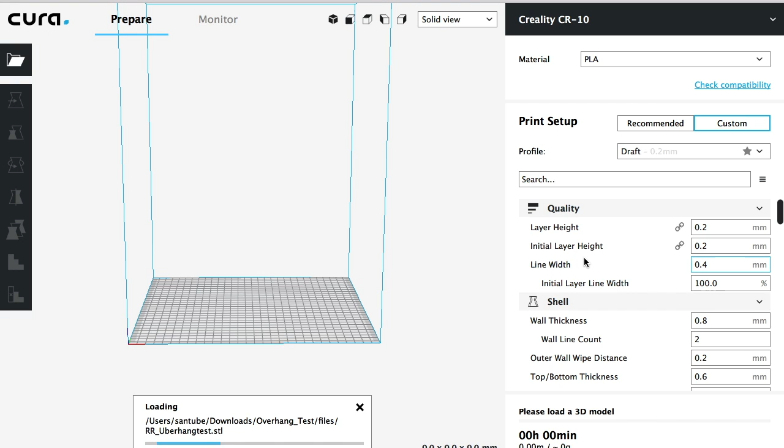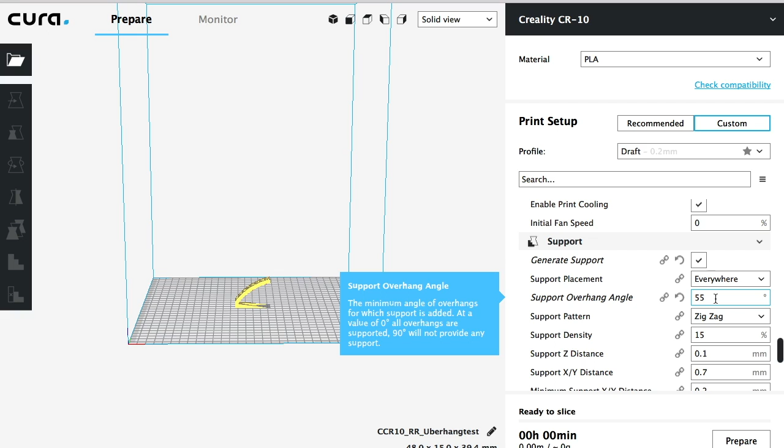Let me talk briefly about the support that Cura comes with. This is going to be mainly a review for most of you, but we're going to use this on our first topic, which is a support blocker. Okay, so if you click on generate support, which mine is already checked off, this is what we're going to be paying attention to: support overhang angle. Basically what this means is at what degree would you like Cura to start building supports.

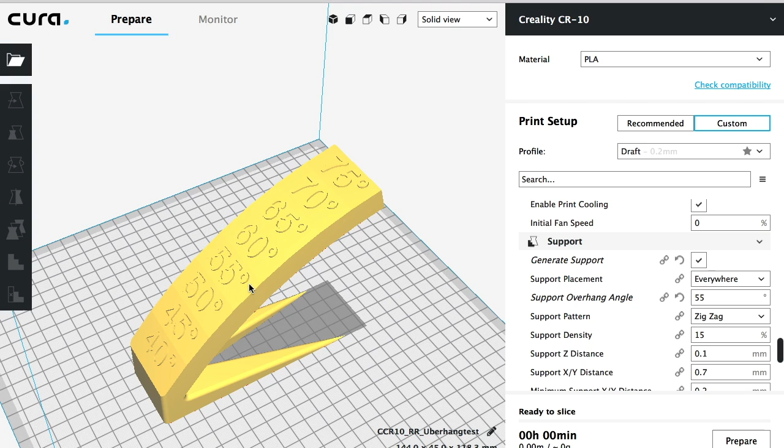So on this one, let's go ahead and scale this up just so we have more of a visual. So at what degree would you like Cura to print the supports? Would you like it to print at 40, 45, 50, 55? Now keep in mind, most 3D printers out there, guys, 50 to 55 is where it starts to need support. So your printer is usually capable of 50 to 55 where it can print without supports.

Okay, so mine's set to 55. So if you notice right around here, which is 55 degrees, the red part is where it's going to print the supports. To give you a better view of this, we're going to go into layer view. Now, why is this important? Why am I going over stuff that you already know? Because I'm going to show you where the supports are being printed, and with support blockers, I'm going to show you how they're removed.

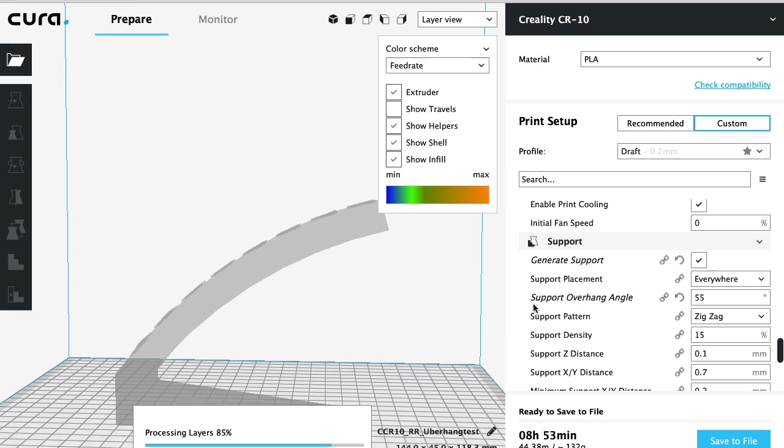Okay, so let's go ahead and slice this so we can get a view of where the supports are going to be and what they're going to look like at the moment with default Cura generating support. So if you notice, from 55 and on, it's printing it all the way through. But let's say we didn't want supports in the middle, or the model that you're trying to print didn't need the whole support, you think it's overkill.

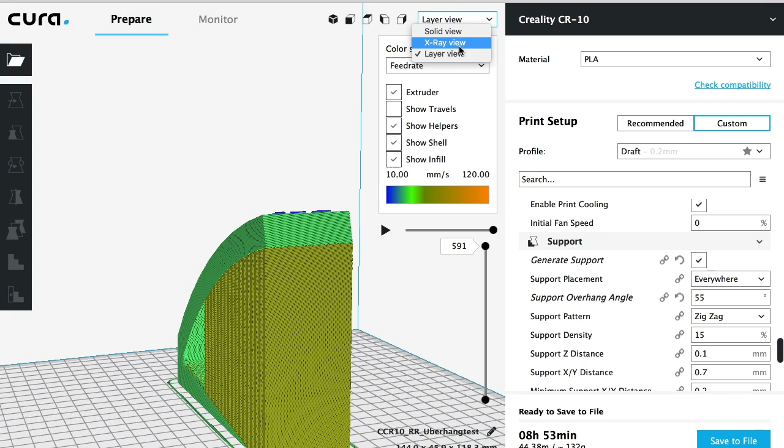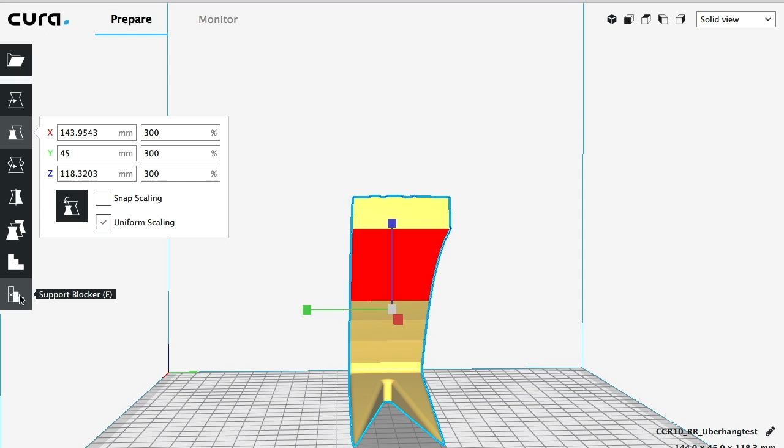So what you can do here is go back into solid view, and you're going to have to click on the model here. You know what, let's go ahead and make this screen a little bit bigger. So if you click on the model itself, which you have to do, you're going to go down here to where it says support blockers, and click on that.

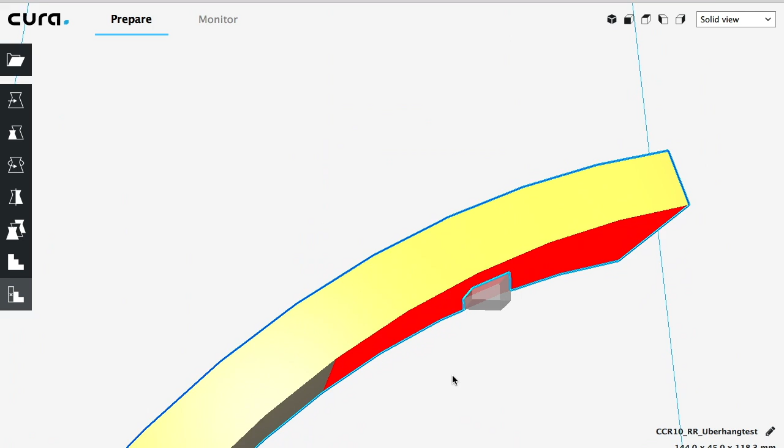Now wherever you click on this model, that's where it's going to block the supports. You can't see the supports at the moment, but we just saw it in the layer view. So I'm going to go ahead and click right there, and now you'll notice that there's a little square gray box there, and this is where your supports are going to get blocked. Now this doesn't help us much when it's only one little square box. So what we have to do is expand this to where we want the supports.

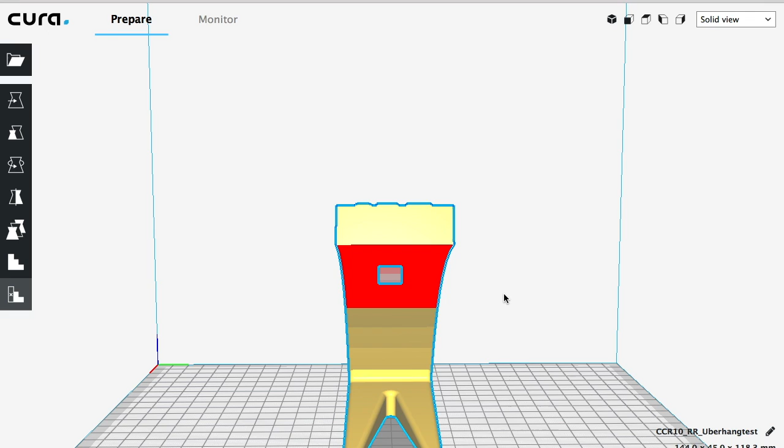Now this might work for certain models that are closer to the ground. But for a big model like this, guys, please be careful. See how the model's highlighted right now and the support blocker's highlighted right now. You have to click outside of it, then you can click on the little gray box. So now Cura thinks of this as a separate model, different from this model here, so you can technically modify it however you want. So we've already clicked on it, and we're going to go to scale.

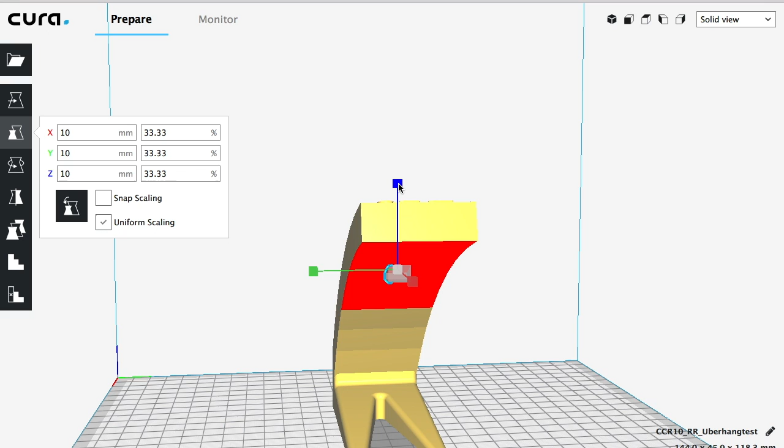This is one thing I don't like about this, and I also don't like about generating custom support: when you expand this, and this is something Cura doesn't tell you, notice everything expands at the same rate. So make sure you have uniform and snap scaling unchecked. Okay, so we're just going to go ahead and delete this. I just wanted to show you that.

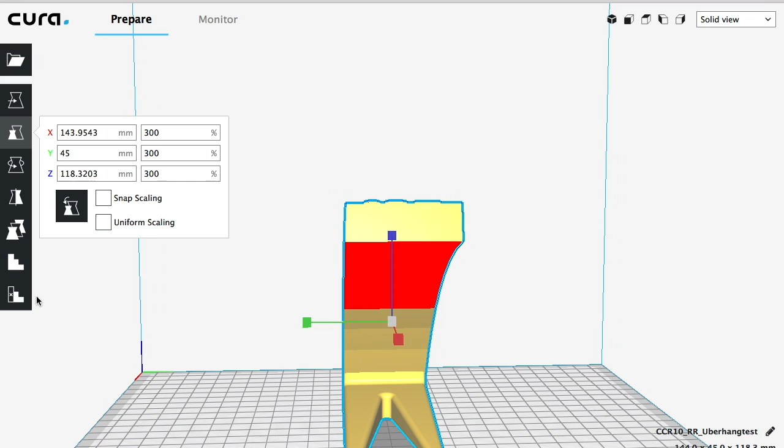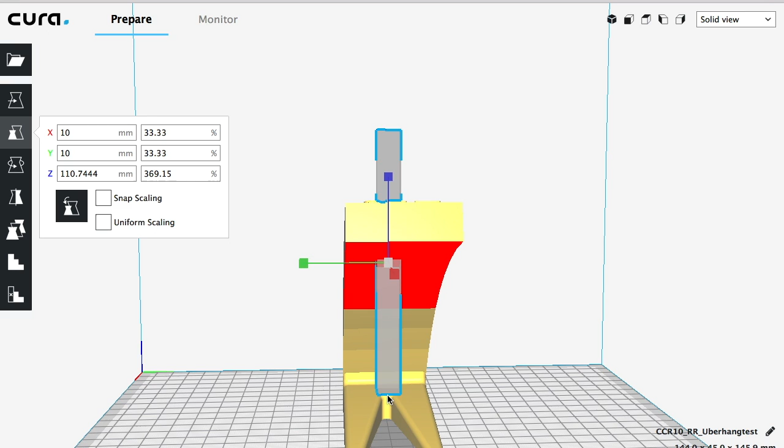So now if I click on the model, support blocker, there's my little gray box. I'm going to click outside, click back on it, and now if I go to scale with both of these unchecked, notice I can actually scale it to how I want. Okay, but another thing is it scales in both directions. So when you make it bigger, it grows on the top and bottom. It doesn't just grow in one direction, guys.

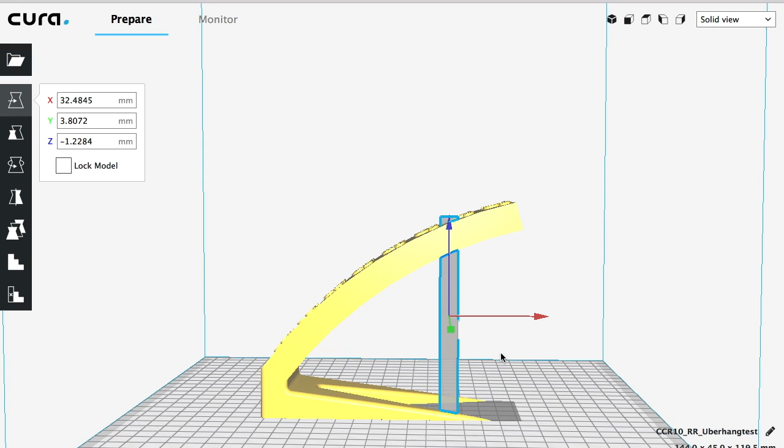So once you have your support there, we're going to click on move. Now you can actually move the support. I'm going to go ahead and move it down. Okay, so now we have the support blocker here. Now you don't want to keep making pillar after pillar after pillar. So what you can do, again, once you have this clicked and it's highlighted, you're going to go to scale. Now this part's a little tricky. You got to make sure you get the right angle on it. Then it'll let you select it and expand it. Okay.

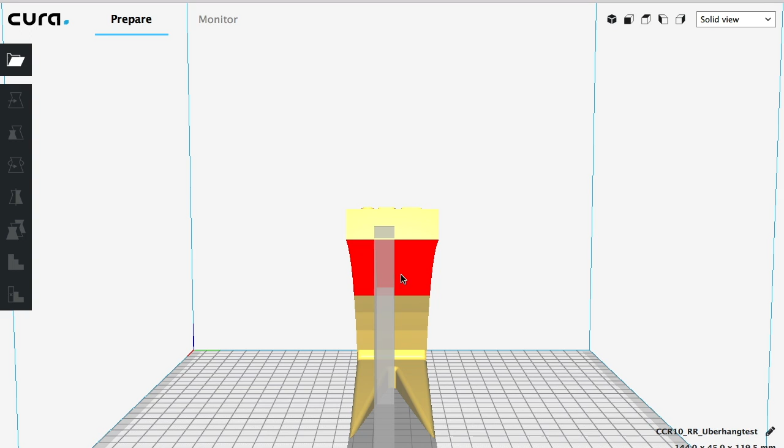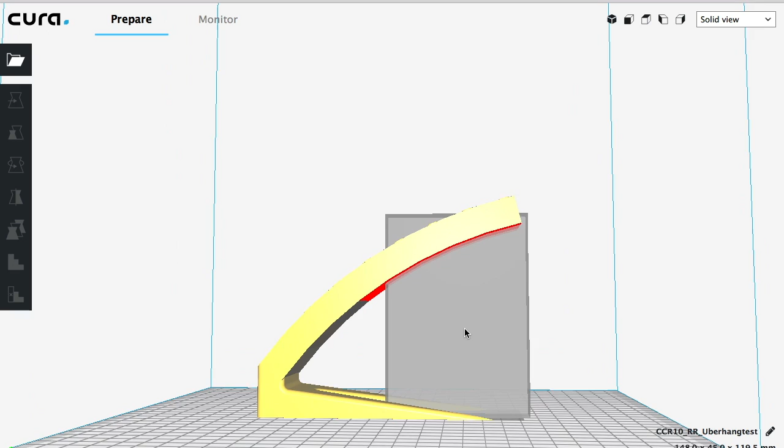So now basically what I just told it to do is I would like supports printed here, and I would like supports printed here, but I don't want it printed in the middle. Okay, now let's say if you wanted to go a little further out, you can actually do that by clicking on this and making it wider. And then again, you would just go into move and just move this over a little bit. Okay, so there you go. Now this is going to print supports, but it's not going to print where we told it not to. So what I'm gonna have to do here is bring this back. I'm gonna go and prepare that for you guys.

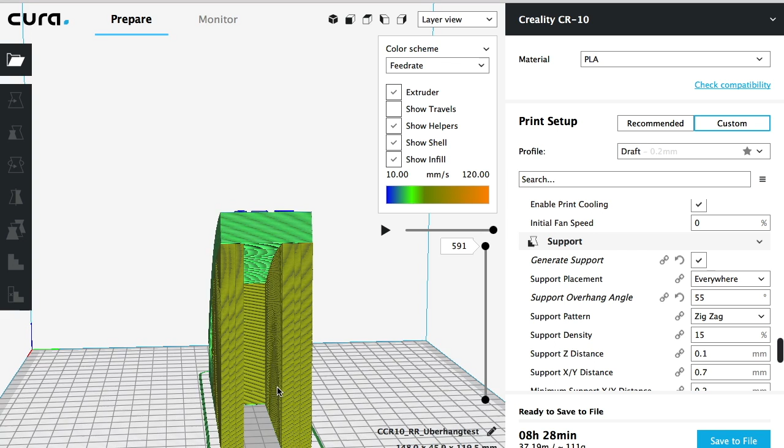Now if I go into layer view, if you notice from the side, same layers, right? It starts at, not percentage, sorry, at the same degree, at 55 degrees, it prints the supports right there. But let's take a look from the front. Notice there are no supports here. This is where our support blocker was placed.

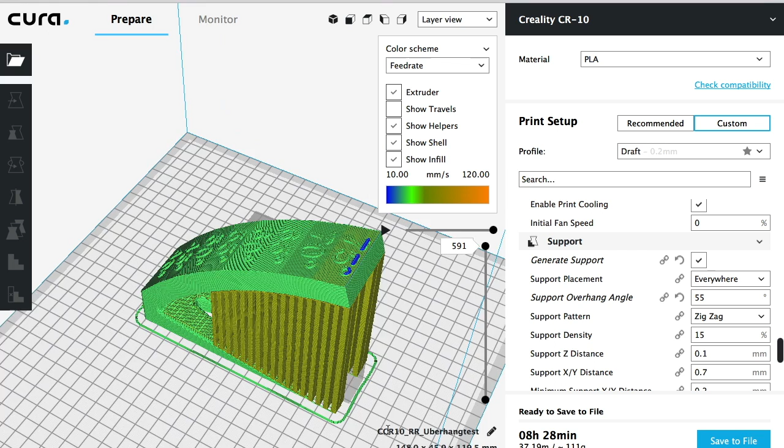Now I left this part of the support blocker up here on purpose. Okay, some people are going to try to fit it perfectly in here or build a column. You don't have to do that, guys. This part does not affect your print at all. If you notice, it doesn't affect it at all. It only affects your support. So you could have made it this big or gone lower below the bed. I like how Cura is not too picky about that. So that was fairly easy. It just takes some time because you have to actually fiddle around with it, get it to the right size and things like that. Okay, so now that we're done with support blockers, we're going to talk about custom supports.

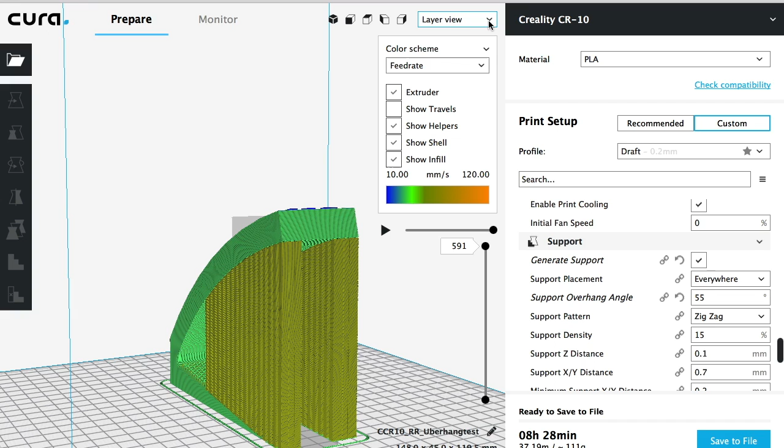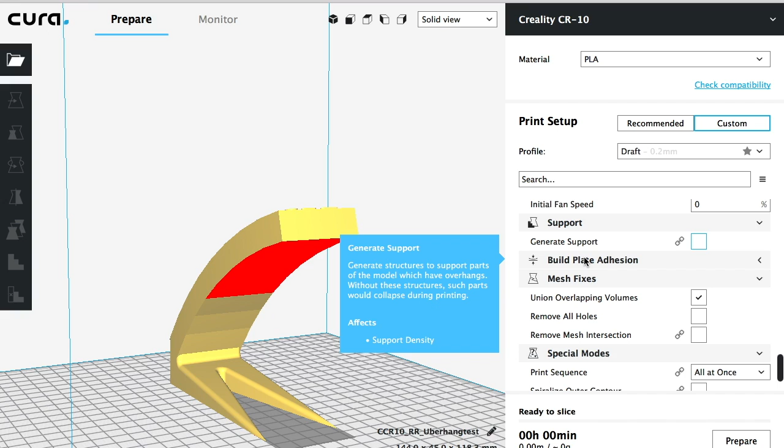Okay, so let's go back into solid view. We're going to go ahead and delete this right here. Okay, so one important thing that you need to know when you're actually using custom supports, you have to have generate support turned off. You cannot tell Cura to create supports on its own by what overhang angle you have specified. You have to have that turned off. So my support's going to be turned off. And for most of you, you're probably wondering why do I have custom support showing on the left and you don't? Well, that's very easy to fix, guys. You're going to go into Marketplace.

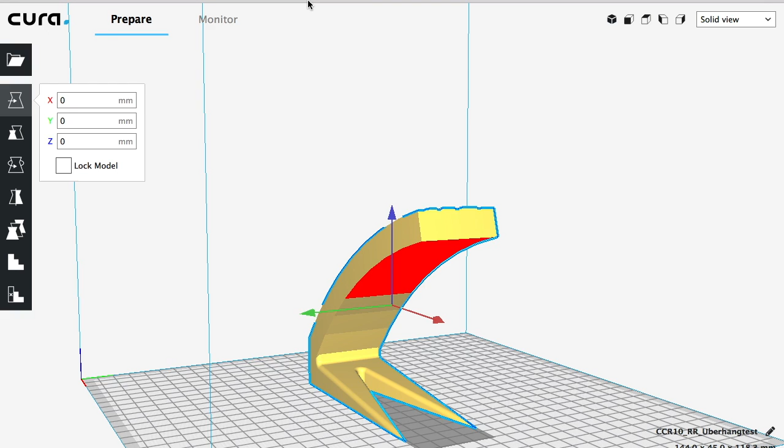Then you're going to go into plugins. There's a lot of great plugins here that you can use, but for today, all we're going to do is custom supports. Mine's already checked and installed. All you got to do is click on this right here, and once you click on it, you'll get an install button. And once you do install, I'm pretty sure on Macs, I don't know about PCs, but on Macs, it will restart your Cura, it'll kick you out, and it'll restart it so you can actually put this on the left side.

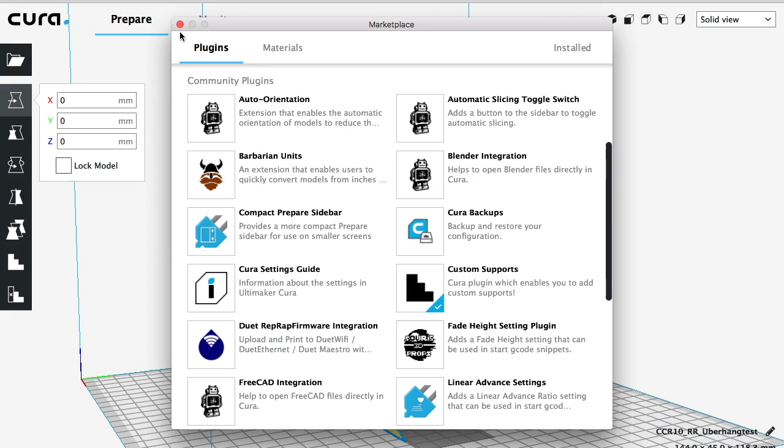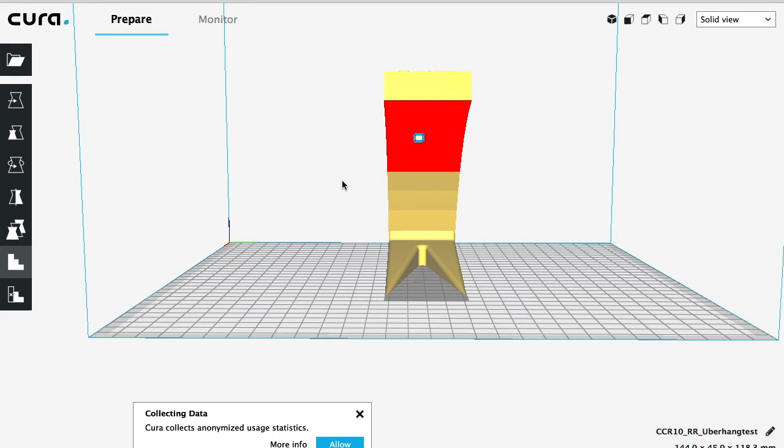Alright guys, to generate custom supports is basically the same concept as a support blocker. What you're going to do is, of course, click on the model itself. Once it's highlighted, then you're going to go to custom supports right here. Once you click on it and you click on the model, you'll notice there'll be a little gray box. Click outside the model, click back into it, and only that part is highlighted. So now Cura treats this as a separate model.

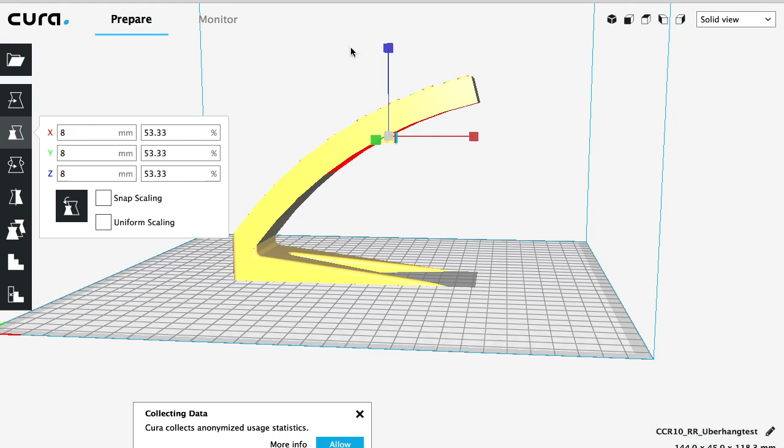So what we're going to do is scale this up first to make it bigger. Now make sure these are unchecked, because if it's not, it's just going to make it bigger in every direction. Okay, so for example, like so. See that? So that's what we don't want. Now if you do need that, where you need a square support, you can actually do that. So we're going to increase the height on this one. Let's go ahead and move it down a little bit right here. Okay, so we're gonna scale this a little bit bigger.

Now I'm doing this on purpose. I'm making it bigger on purpose to prove a point here. Once it's past the bed, guys, it's going to go ahead and lift up your model, and that's something you need to be cautious about. So you notice my support right here is going below the bed. When I do that, it's automatically gonna bring that model down to the bed to make it flush right here, lifting the model that you're trying to build a support on.

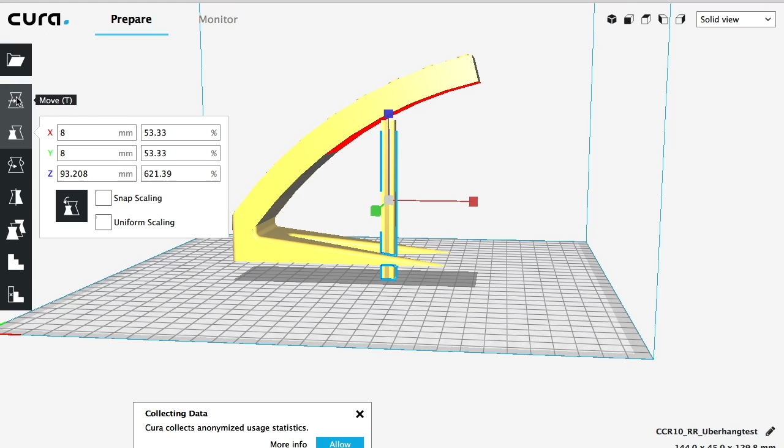So what you need to do is scale it to the right size of whatever you're trying to use it for, and once you do that, then you're gonna go ahead and move it up. Okay, and you just want to make sure that your model is sitting flush on the ground. There we go. Now our model is sitting flush on the ground, and I'll give you a different view of this. So you see everything is great. The support's touching the bed, the model's touching the bed.

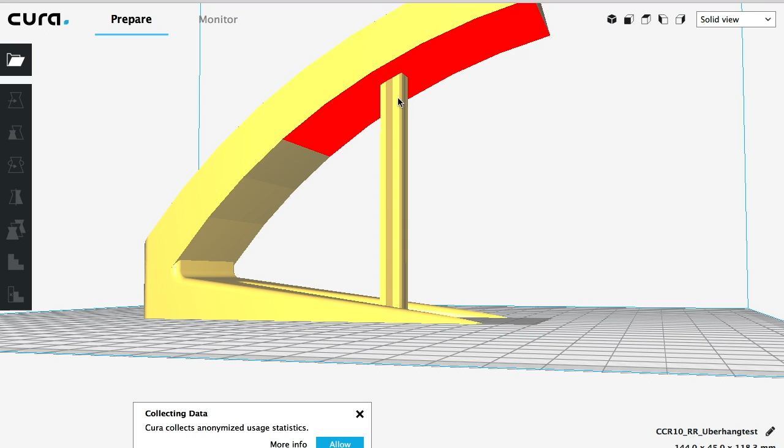And another thing you have to make sure is that your model and the support you just built are connecting somewhere, because otherwise when it goes to print, it's going to print the model, and if there's a little bit of a gap here, it's going to not print anything touching it. It's going to print the model, and then it's going to print the support with the gap right there, which kills the whole purpose of doing this. So again, make sure your custom support is touching the bed and it's not lifting up your model, and at some point they are touching each other where it's connecting.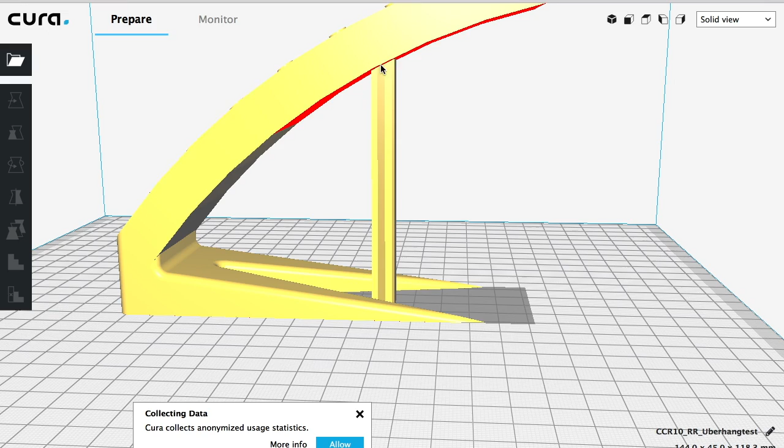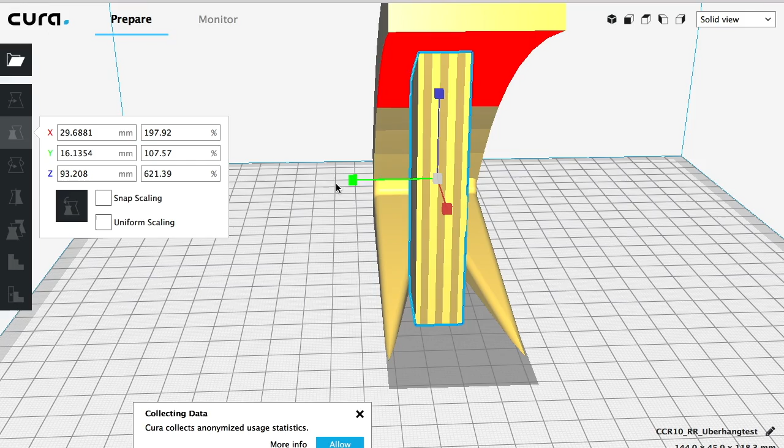Okay, now once you do that, you navigate exactly like you did with the support blockers. You go and click on it. Once it's highlighted, we're going to go to scale, and this way you can make it bigger. Okay, so if you notice, it's longer coming out, and if you want to make it thicker or wider, you can do so as well. So there you go. Alright guys, there you have it.